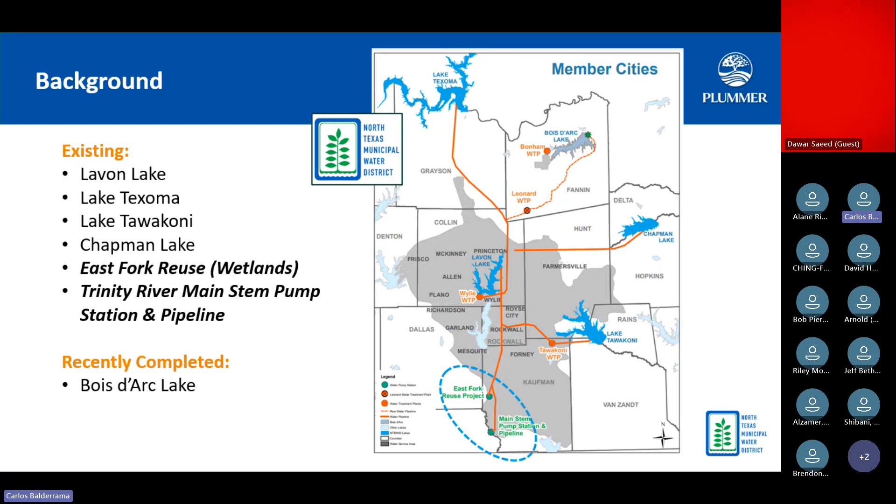Now, this is an indirect potable reuse project. If you're unfamiliar with what that is, I'll walk you through that. Up here, we have Lavon Lake, and again, the district has water rights there, and their main water treatment plant is at Wylie, shown there.

Water is diverted from the lake, treated to drinking water standards, distributed throughout the service area, and then a portion of that comes back as wastewater. That flows to the wastewater treatment plants, shown with these orange dots, and then that's treated to the quality their permit requires. Discharged, these on the south are discharged into tributaries of East Fork of the Trinity River. Those up here discharge into Lake Ray Hubbard, which is a city of Dallas lake. The district and the city have an agreement to allow that equivalent volume of water to pass through and flow down into the East Fork Trinity. That water then flows down to a diversion point located adjacent to the constructed wetland.

The district diverts a portion of that effluent into the wetland where suspended solids and nutrients are removed, improving the quality of the water before it's pumped back up to Lavon Lake, about 43.5 miles. It's pumped up, as the diagram shows, to the upper reach of this easternmost arm. That water then spends about a year detention time in the reservoir before it finally makes its way back to the water treatment plant.

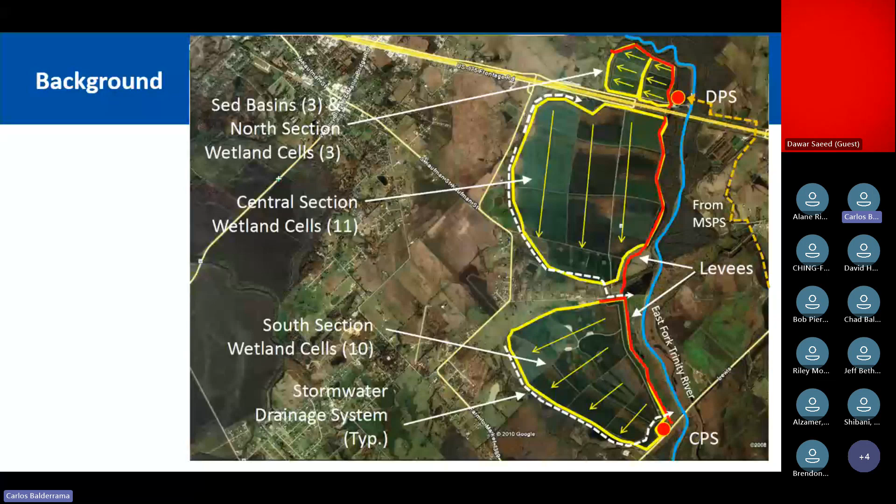So here's some aerial shots. This shows the river intake, the diversion pump station, and the 3 settling basins, wetland cells, the highway, and then the central section you can see here.

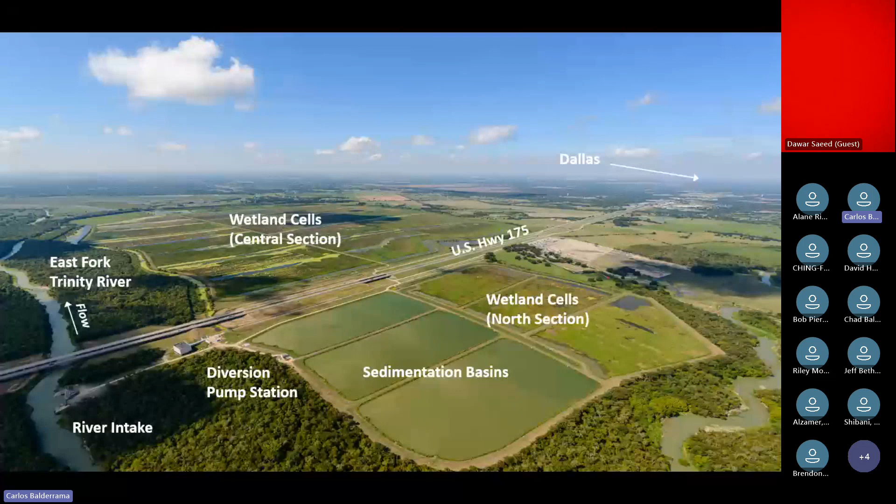And now we're looking at the central section with the river here in the foreground. Then now we're looking from south to north. This is the south section. The water flows through these cells, is collected, and comes into this terminal pond, picked up by the conveyance pump station, and pumped back up to Lavon.

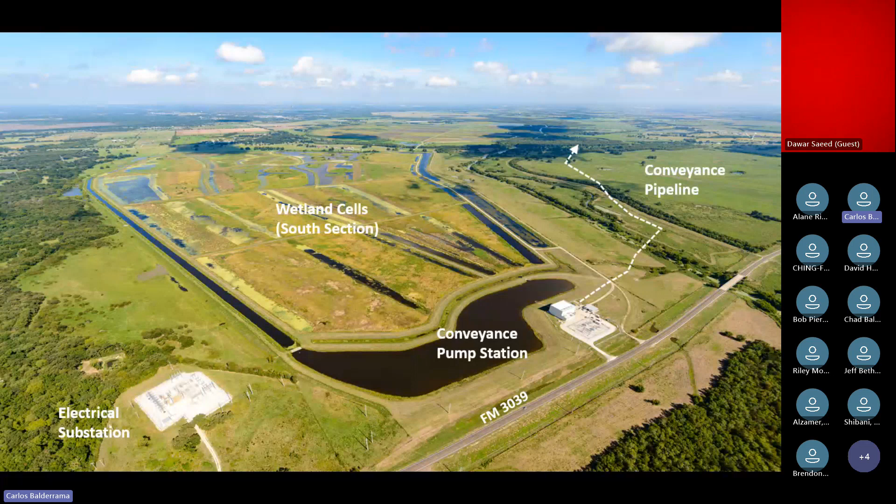This is the outfall at Lake Lavon. This photograph was taken during construction or right after construction, and the lake was down about 15 feet below conservation pool. So they were able to lay all this riprap in the dry, which was beneficial at that time for construction, but not so good for water supply.

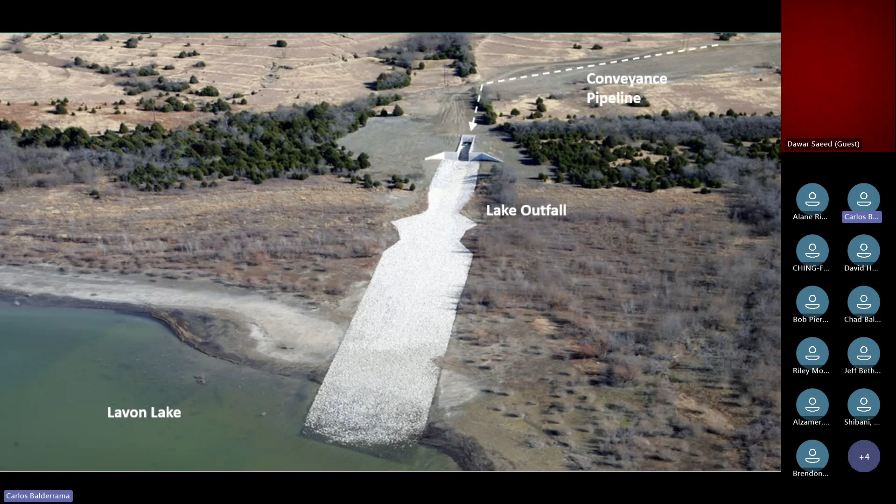So here you have the main stem pump station, an aerial view of it, showing the pumps there. And then we have a forebay, different from the East Fork wetland, which allows solids to settle out there.

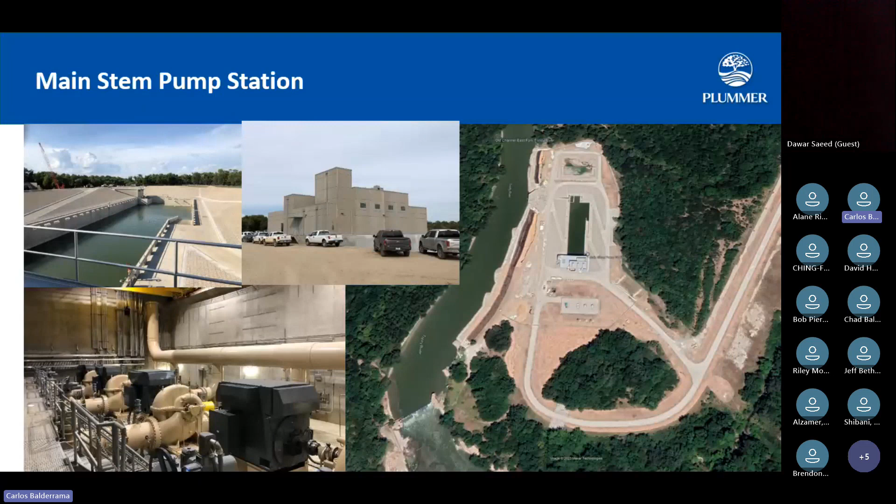Just talking about some background and history of the project. This project actually began in 2003. The board authorized it in August of that year. At that time, there was an urgent need for water that the district had. They were undergoing tremendous population growth in their service area, and of course water demand increased along with that population. That was coupled with some persistent droughts going on back then, and so the reservoirs were down.

The goal was December 2008, with final completion the following year in '09. So the district elected to go with a design-bid-build delivery approach, and we subdivided that into 11 projects. We had a different design team assigned for each of those projects so we could all work in parallel, with a lot of communication back and forth.

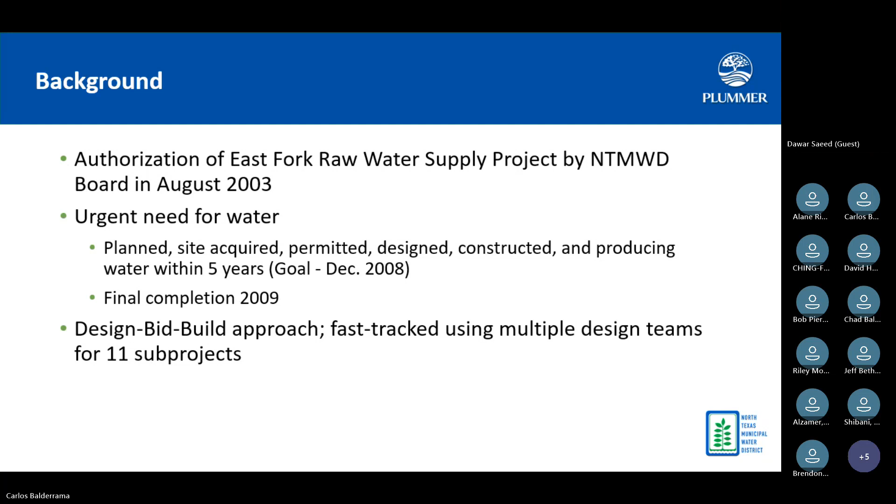This shows some of the project milestones. Again, we had a notice to proceed early in '04 for the design and permitting team. The district acquired a site in early '04. The permitting team got on it very quickly, submitted the 404 application in mid '04, and then about 15 months later, they had their permit in hand, which was a tremendous undertaking. Loretta will speak about that later in this presentation and also over the luncheon presentation.

All the design packages were completed in early 2006, which also included designing 2 early on-site nurseries, and we'll talk about why we needed those. Notice to proceed for the various projects was in '06, and they had a construction period. Then the wetland was substantially complete in late '08, and we began producing water in January of '09.

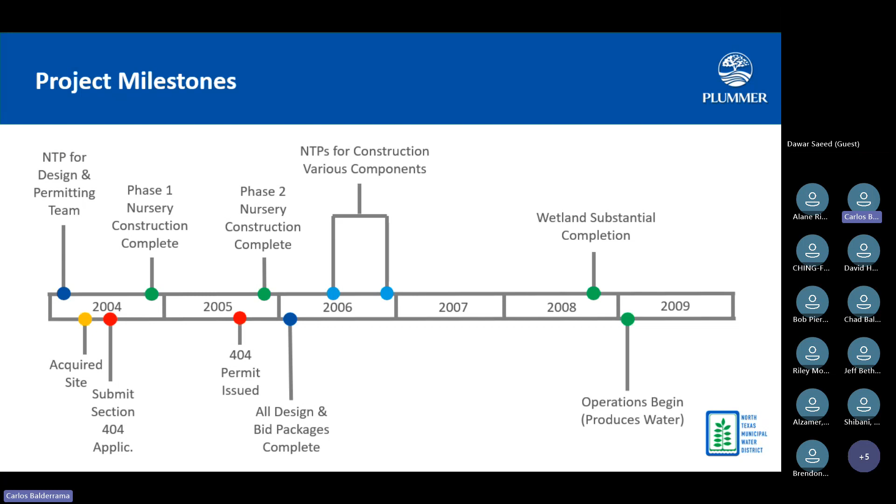So we met our goals of having water produced quickly within about a 5-year period. Project cost in 2009 was $280 million, and that included both pump stations, the pipeline, the wetland, and all the other ancillary costs such as design, legal, permitting, and so on.

The Main Stem pump station was completed in 2019, and that's almost half that cost as in 2009, so you can see how prices escalated during that time period. But in spite of all that, the cost of raw water produced from the project is very reasonable, 74 cents per 1,000 gallons. Compare that to water produced from a new reservoir, which is more than twice that, at 328 per 1,000 gallons. So it's a very cost effective water supply for the district.

As far as performance, this project has provided 143 billion gallons pumped up to Lake Lavon. And you can see the tons of constituents removed from the water before it went up to Lavon.

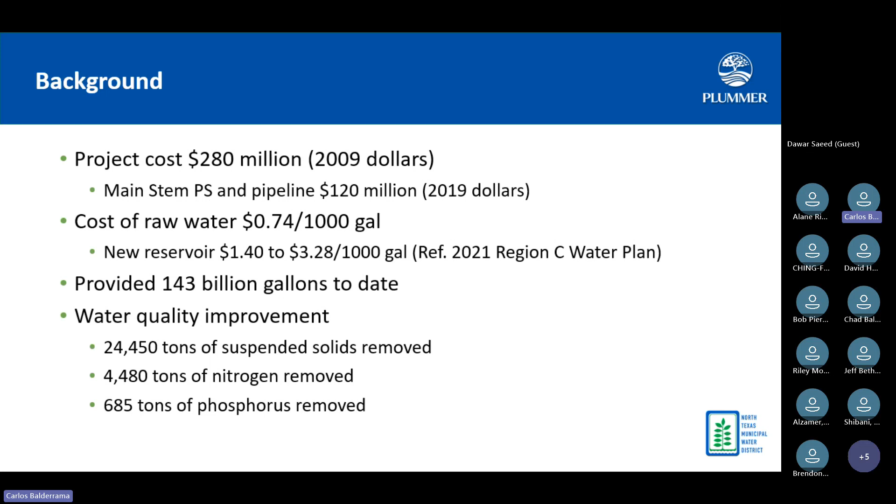I'm going to pivot and talk about some of the engineering aspects of converting a 2,000 acre working cattle ranch into a functioning wetland in about 5 years' time. Being a water supply project, everything focused around the amount of water that would be produced, so that was the main design basis everything came from. We had projections available on the expected effluent in the river itself.

You can see how projections went up and peaked in 2015, and our flow rates were based on this projected amount of effluent for diversion that year. We analyzed that and developed 3 different flow regimes into the wetland: a low treatment flow, a normal treatment flow, and a peak treatment flow, measured in million gallons per day - 24 to 48, and 107, which was later reduced to 91 MGD. The 91 MGD is what we used through the remainder of design, but we had a wide range, 24 to 165 MGD, that we had to design for. That was challenging at times.

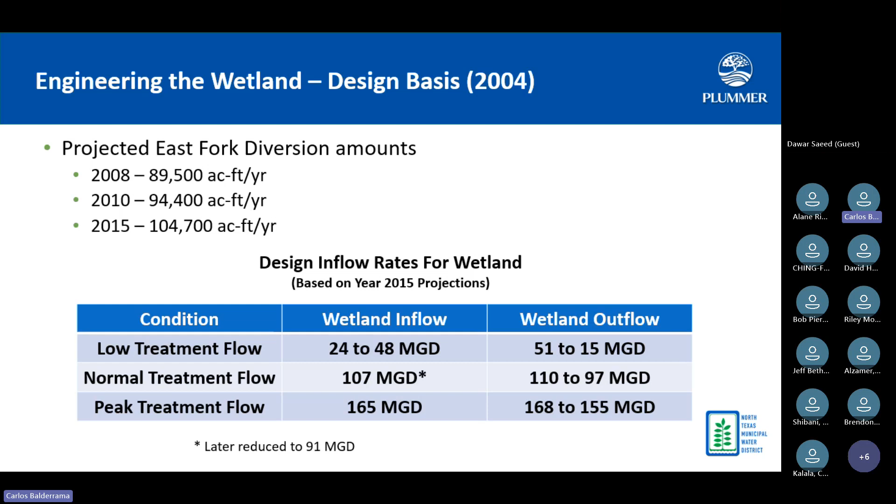Normally you look at inflow rate, which we covered previously, and inflow concentration, which we looked at using data available within the river. Based on that, you identify treatment goals for outflow concentration, and then work into how big a wetland can be, how you size it. But we didn't have that in this case - we had a limited footprint, a 2,000 acre easement the project had to fit on. We just needed to maximize the treatment area within that footprint, so we used that as our treatment area and then backed into the outflow concentrations, kind of the reverse.

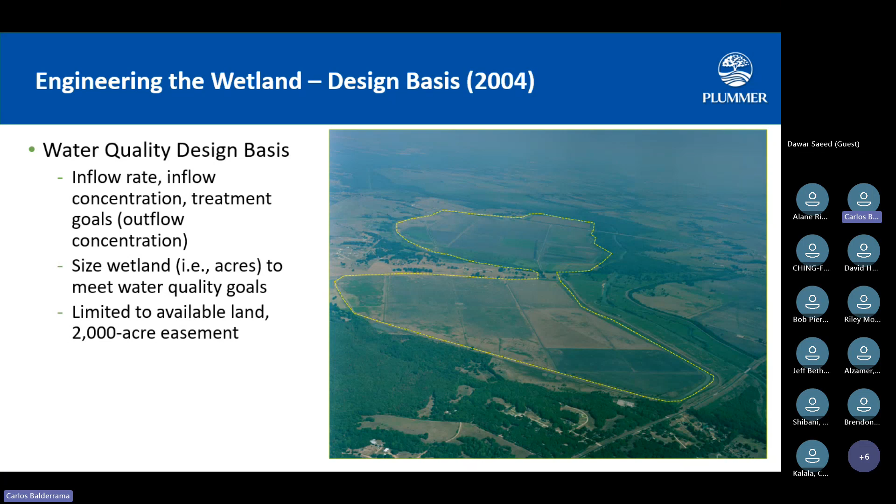So here's what we had - wide range of flow, wetted area 1840, and this was the projected effluent quality based on that period of record. We used three different water quality models to project the concentrations of total suspended solids, total nitrogen, and total phosphorus coming out of the system, and used best professional judgment to bracket that into a range. Of those, phosphorus is really what we focused on because that's more or less the controlling nutrient in Lake Lavon for algae.

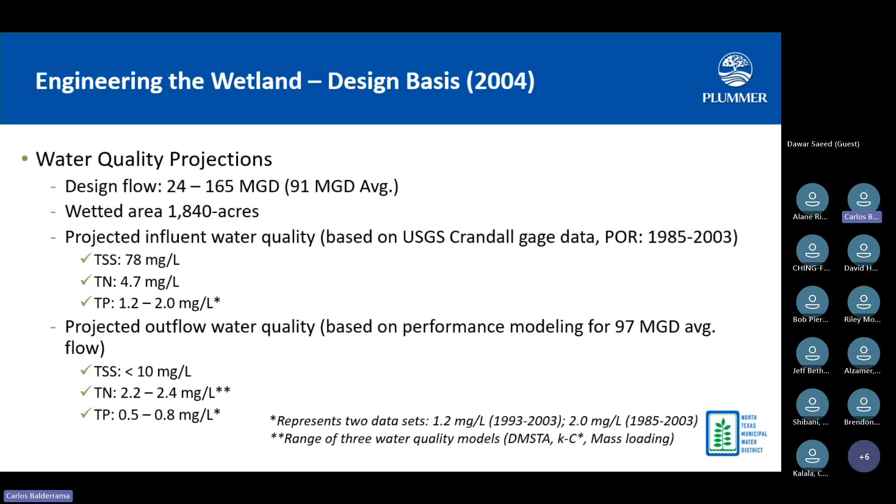Again, being a water supply project, hydraulics is everything. We worked through a monthly water balance and looked at inflows and outflows from the system, identifying the expected water loss for every month of the year, which was helpful in determining the quantity we would pump back, but also the quality too, because certain constituents increase in concentration when you have evaporative loss. So that was a necessary step as well.

Then we did normal civil engineering for water control structures, but for the wetland cells themselves, we wanted to manage the water with a range of 6 to 18 inches in depth over that wide range of flows, which was a challenge. We wanted minimal adjustments for the gates by the operator, so what we settled on was structures flowing into and out of these wetland trains needing 30 feet of weir. We accomplished that using three 10-foot rectangular weir gates, which allowed the water level upstream and downstream to stay within their desired range.

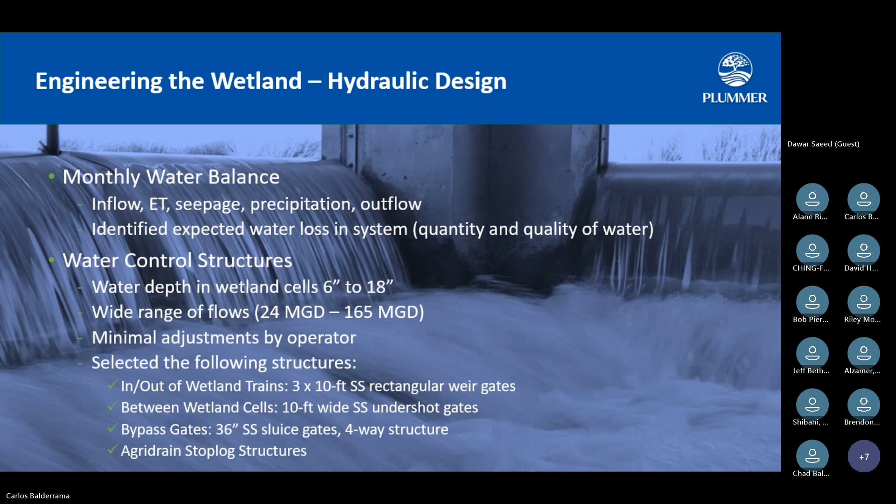We produced a hydraulic profile through the system from the sed basins all the way down the conveyance pump station, through every wetland train and through all the flow ranges. We used conventional equations and approaches for open channels, pipes, weirs, and so on. But flow through the wetland cell wasn't so widely known, so we applied an equation used in the Everglades area for the big stormwater treatment areas.

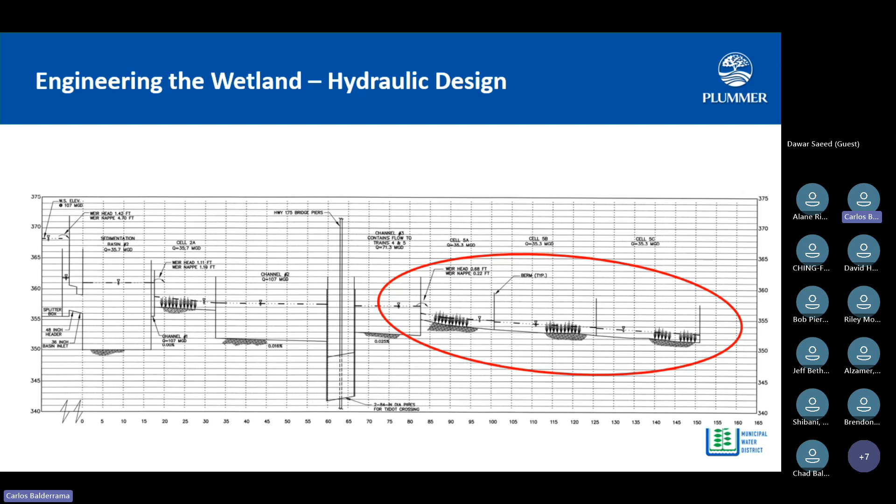The train and cell layout is also important. We wanted to flow by gravity from the diversion to the conveyance pump station, maximize treatment area, exclude stormwater, and have hydraulically efficient cells. By that, I mean we wanted to use every square foot of wetted area and allow water to flow through, because if water doesn't flow through, you don't have any treatment improvement.

The approach we adopted was to have a single inflow point and then a deep water zone immediately thereafter that allowed the water to spread out across the full width of the cell. Then a shallow marsh area with sheet flow, basically 6 to 18 inches of water, followed by an intermediate deep zone. The purpose of that was twofold: these deep zones served as the borrow area for the levees or berms, but also hydraulically redistributed the water across the cell. So if you had a short circuit, it provided an opportunity to recapture and spread it out. Lastly, we had an exit deep water zone and then a single gate structure between the cells.

Large earthwork project—we didn't have goals of hauling dirt in or out, so it was all balanced on site. It was an iterative process between the hydraulic grade line and cut-fill balancing that went through on the site civil design. We also spec'd out precision graded marsh areas with a slightly sloped bottom that varied from 3/10 to 1.5 feet, depending on the cell.

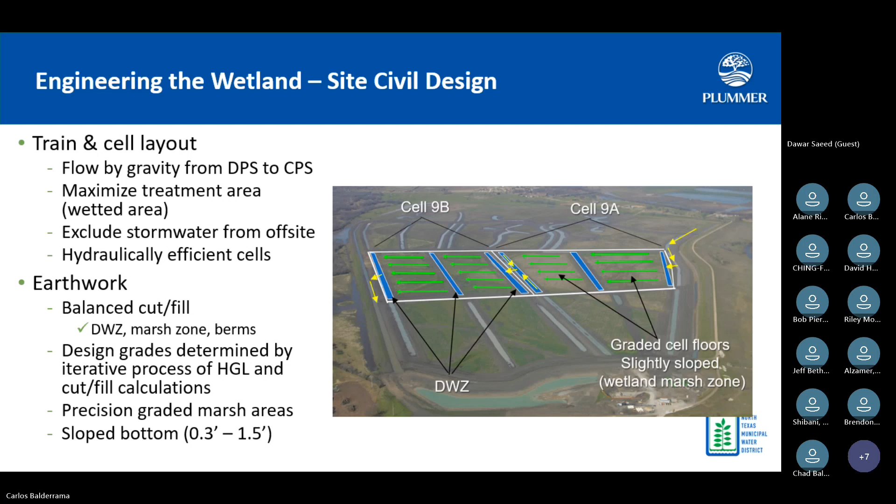All right, flipping to lessons learned.

Fast forward 14 years, what have we learned since design was completed? Things change. We projected a 91 MGD average inflow, and the actual observed through this period is about 33 MGD, about a third of that. There's a reason for that: there were persistent droughts, so base flow into the river was reduced significantly, and all those water conservation measures that the district implemented really worked, so we didn't have as much effluent coming back into the river system.

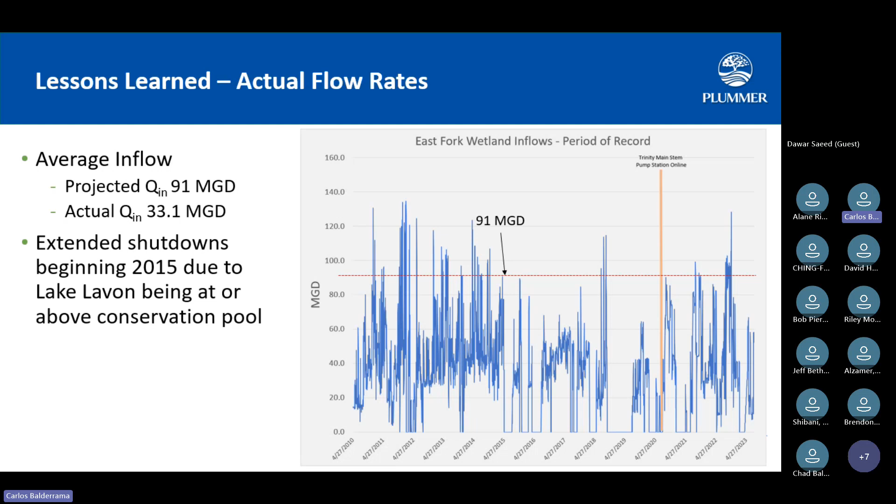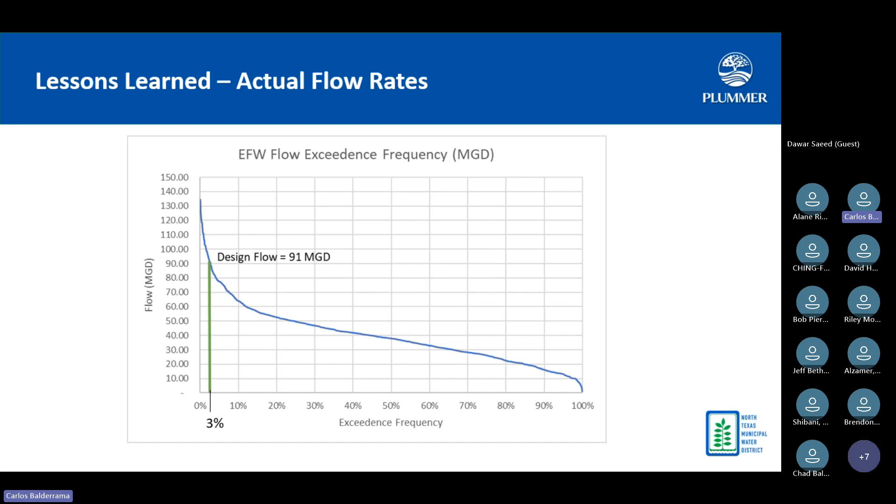Here's another way to look at it: this is a flow exceedance frequency curve, with inflow in MGD and our design flow at 91 MGD. Basically, we exceeded that only 3% of the history of the project so far, which again points out, in a different way, that we've had much lower flow.

On cell hydraulics, we learned that the combination of the sloped cells and low flow caused water to be much shallower at the upper end than anticipated, and pool up at the lower end. This really affected the vegetative community, since some plants tolerate deeper water than others. At the lower end, plants that could not tolerate deep water were drowned out, and we had to replace a lot of those with giant bulrush. We had projected we'd have somewhere between this M2 profile and normal depth, but in reality, because we were pumping about a third, we were between this M1 profile and a level pool most of the time—which makes sense at a lower flow rate.

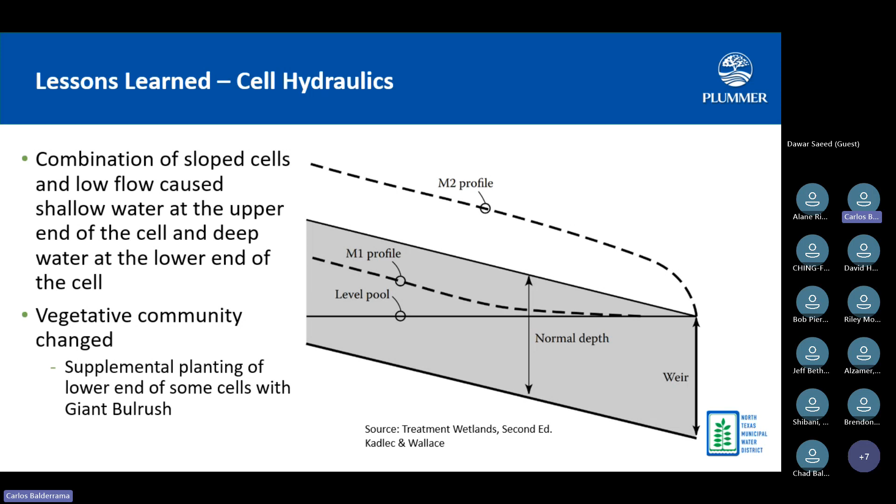We found that the deep water zones and the precision grading did a great job of distributing the water across the width of the cell, making them more efficient hydraulically.

But sometimes a short circuit would form. We found that the low flow really concentrated in that short circuit, and then you had a fairly significant dead zone as a result. So it's important for those to be corrected whenever they pop up.

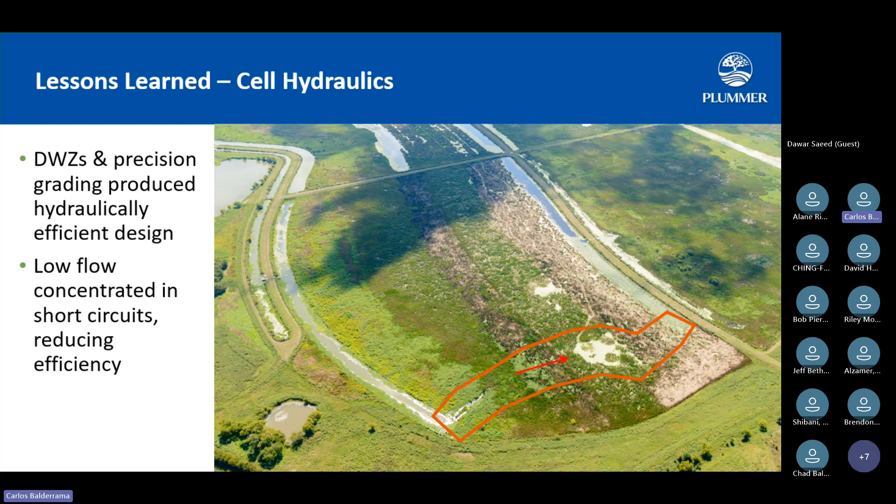Also, during extended low flow periods, we took cells offline to reduce evaporative loss. That didn't really affect the vegetation of those cells because it mimics the hydro periods of natural wetlands.

It also provided an opportunity for the district to perform maintenance on those cells, so it wasn't a bad thing.

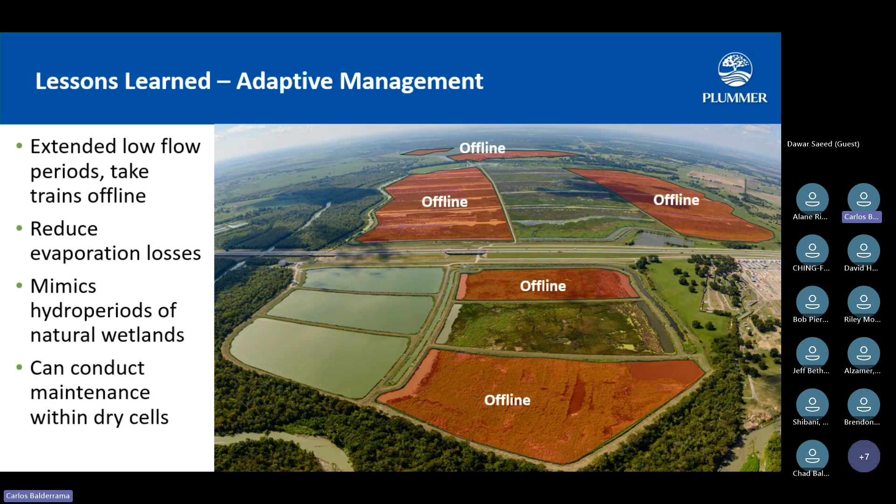All right, water quality. This is a table looking at TSS, nitrogen, and phosphorus with the projected and actual concentrations flowing in and out, and then the mass removed and concentration removed.

Now, for TSS, the projected and actual amounts coming in were relatively similar. However, we were producing more TSS coming out of the system than projected, and there are reasons for that we'll go over in a moment.

For nitrogen and phosphorus, because we had less base flow into the river, it was really dominated by effluent from the upstream wastewater plants. So the nitrogen and phosphorus concentrations we saw were very close to what was being discharged from the treatment plants upstream.

We saw that even though the total nitrogen was about twice expected, we still had really good removal of that.

On phosphorus, we trended also towards the upper end of the range, but actually we had many occasions where we had 3, 4, and even 5 milligrams per liter coming into the system, much higher than anticipated on that range.

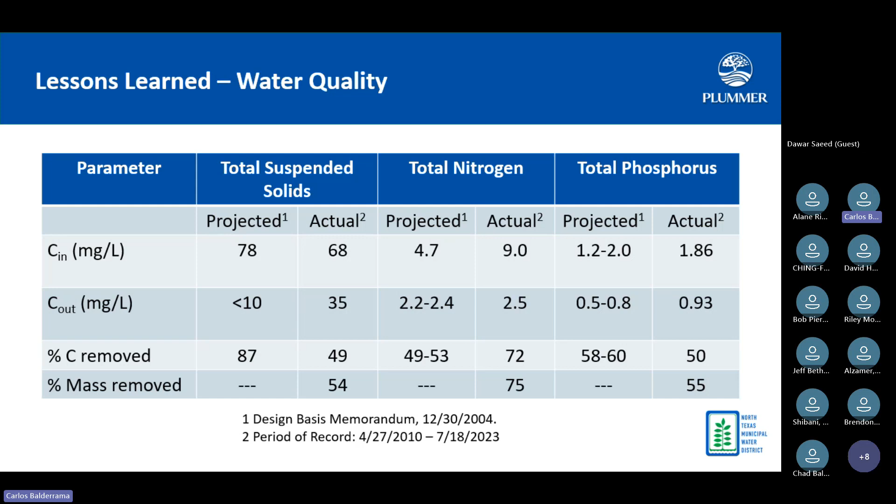In spite of all that, we had about 50% concentration reduction and 55% mass removal.

Coming in, we had more or less base flow with a couple of little rain events, and TSS was fairly well in hand there. But then you got a big river flow event with some peak flows, and it really stirred things up, as you might expect in the Trinity River, with very high TSS during those peaking events.

We found that the TSS during those peaking events was taken out very efficiently through the settling basins, as you might expect, because we had larger particles in the water column that settled out nicely.

But the rest of the time, we had colloidal type solids and algae that were diverted in and didn't really settle out. That was also taken out in the wetland downstream.

But here's one of the reasons we had higher outflow TSS: carp made its way into the system and became established. They're bottom feeders, they like to stir things up, and they really impacted the water quality, especially the TSS.

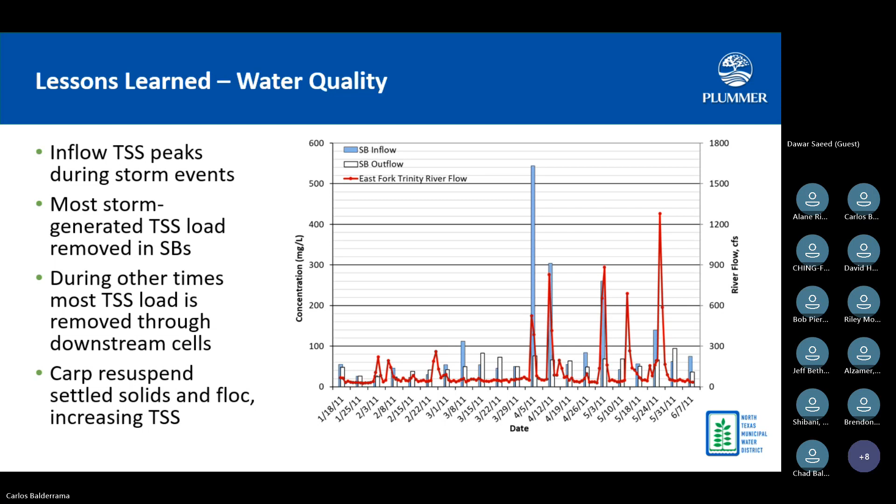Nitrogen removal in a treatment wetland is both microbial and plant uptake, which are the primary mechanisms. So, as you would expect, we see the seasonality of nitrogen removal, and that's what we observed.

Phosphorus also has some removal through microbial activity and plant uptake, but there are several other mechanisms for removing phosphorus that are not temperature dependent. So we saw that remaining more or less constant, which is pretty much what you'd see in other treatment wetland systems. This was no different from the others.

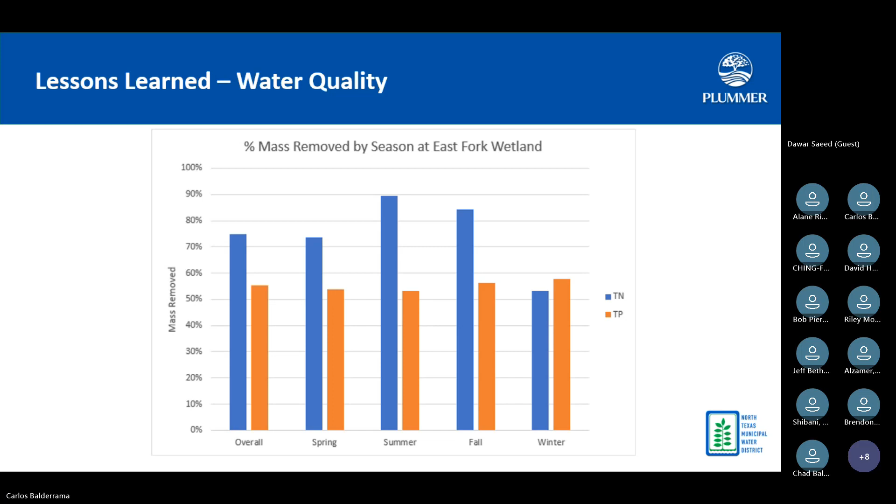All right, I'm going to hand it over to Loretta. She's going to talk about vegetation and permitting.

You're dealing with a natural treatment system, especially a wetland. Plants are very important. They provide a lot of the structure within the water column, as well as organic carbon for the microbial population to colonize and support their growth. So our goal is to have a very diverse, dense, aquatic macrophyte community. Emergent plants in particular is what we want, but we also need submerged aquatics.

About 80% of the constructed wetland is emergent marsh. The rest of it's in the deep water zones that Tim mentioned, and that works together with the dense vegetation immediately downstream of them that helps facilitate dispersion of flow across. The challenge when you're doing a 2,000-acre wetland is that you need a whole lot of plants in a very short period of time.

So you really can't rely on natural colonization. We needed the system to be up and producing high quality water as quickly as possible. So our approach was to look at propagating those plants on site. We had 1.8 million plant plugs. All of these were hand planted across the 2,000 acres.

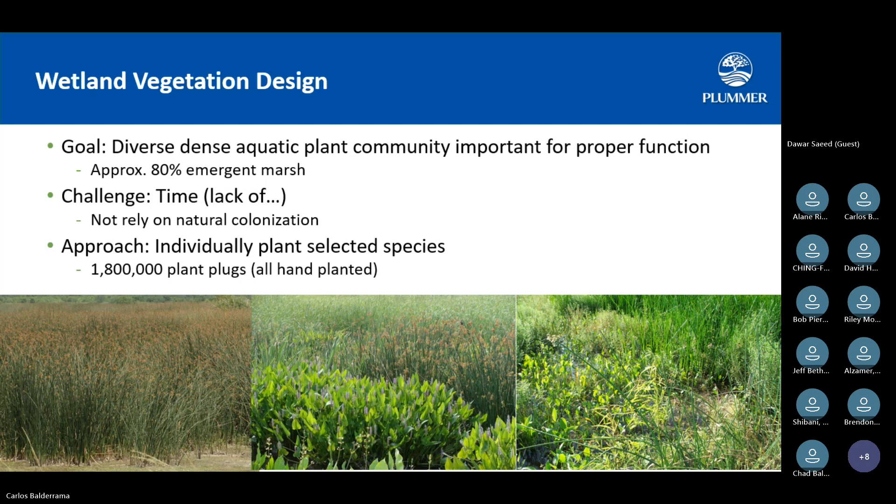Wetland design: we did a phase 1 nursery to be able to propagate first the plants we couldn't source on site with Bunker Sands, and actually developed several restoration areas for duck habitat that had some aquatic plants within it, but again, we were in drought. So we looked at 9 species we brought in from commercial nurseries, mainly from the Panhandle of Florida, to have something somewhat acclimated to the same climate we had here.

We produced those in the first nursery, then transplanted them to the phase 2 nursery, much larger, about 190 acres. We also harvested some plants from those duck habitat cells. So we had 18 species total, and that's what was used to propagate all the plants used to plant the full-scale wetlands. We began planting in January of 2007, and about 85% of the plants were planted in the middle of winter. So it's also good to have the plants on site that you're harvesting from. Nurseries don't like to get plants to you in the middle of winter.

This was the phase 1 plant nursery. You can see the initial planting. This one was actually outside the footprint of the constructed wetland. We used an area that's now called Bunker's Pond. It was another habitat area that Bunker had developed. Started planting in October of 2004. In less than a year, it looks like this.

Wetland plants are very productive, and when you do them with good nutrient-rich water, you feel like you have a green thumb.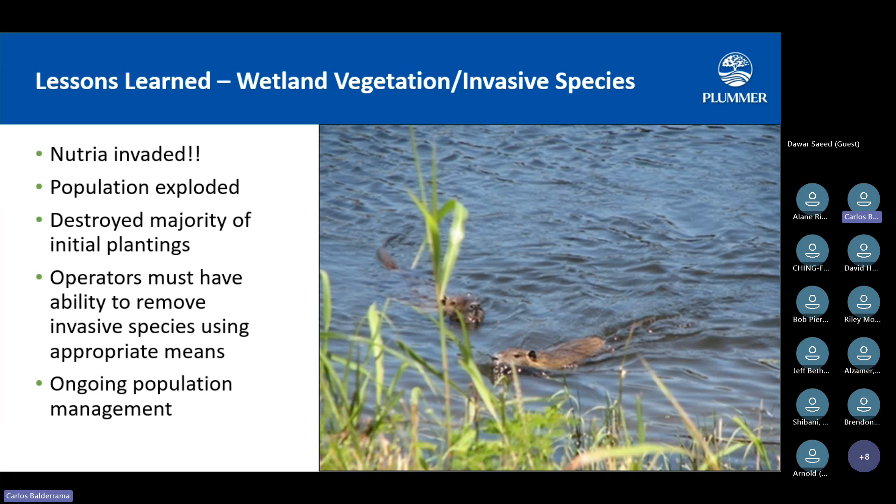Ongoing population management continues today. After we finally got things under control, there was a whole lot of Nutria cleared out in 2010. We've been gaining ground ever since.

The other thing that came in, as Tim mentioned, was carp. They come in through the pumps as little bitty fry. For the first maybe 6 months of their life, they're subject to predation from birds. Then they get too big to be eaten, and they start spawning in the wetland. A mature carp will produce about 3 million eggs per year.

You can see with the photo here on the left, this was a deep water zone where our TSS was over 100, about 135. The operators have a couple of pumps and they can drain down a cell and pump out the deep water zone to basically expose those carp. Natural predation takes effect, and then we were able to put water back in, and you got 13 milligrams per liter. Substantial difference.

The other thing the carp do is they affect the vegetative cover. They are bottom feeders. They'll knock out a lot of the softer tissue plants. As they're feeding across the bottom and ingesting the organic matter, they're basically pumping phosphorus right back into the water column through their digestive system. So they dramatically affect the system performance.

So that both affects not only TSS, but our nutrient loading within the system. We also have some other invasive plants.

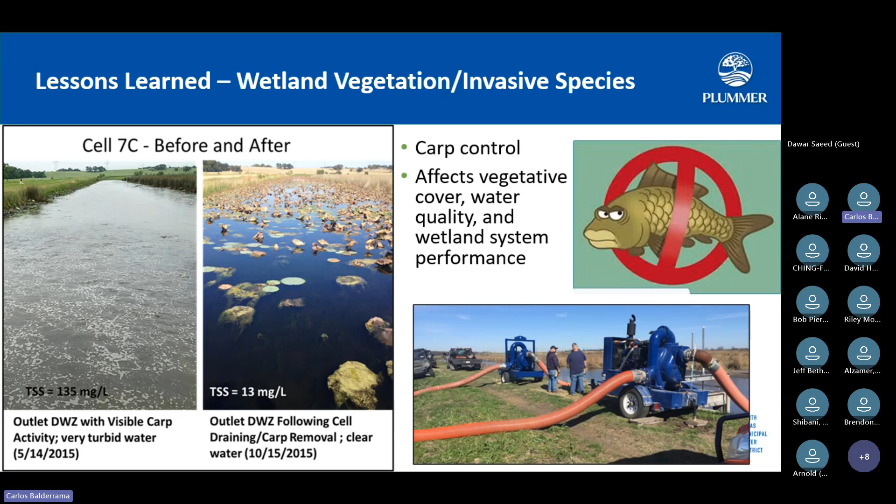Within one of the duck habitat cells, there was water lotus. This is this plant down here. It's very aggressive. The waterfowl come in to feed off the seeds. They've basically planted water lotus in almost every cell we have out there. How do we compete with that?

We don't want to be spraying a whole lot of extra chemicals that would kill all the other desirable plants that we have in here. So what we've been doing is planting plants robust enough to compete with that, primarily the giant bulrush and Holmes bulrush. We've been pretty successful in knocking it back.

Another plant that comes in the upper ends of the cell where it's really shallow water with these sloped bottom cells is climbing fern. It likes to cover over and smother the emergent plants we have there. So what we do is prescribed burns. Again, we don't want to spray anything that would kill everything we're trying to do. So they do prescribed burns during the winter time, and that helps control the climbing fern as well as getting the new growth to come back in.

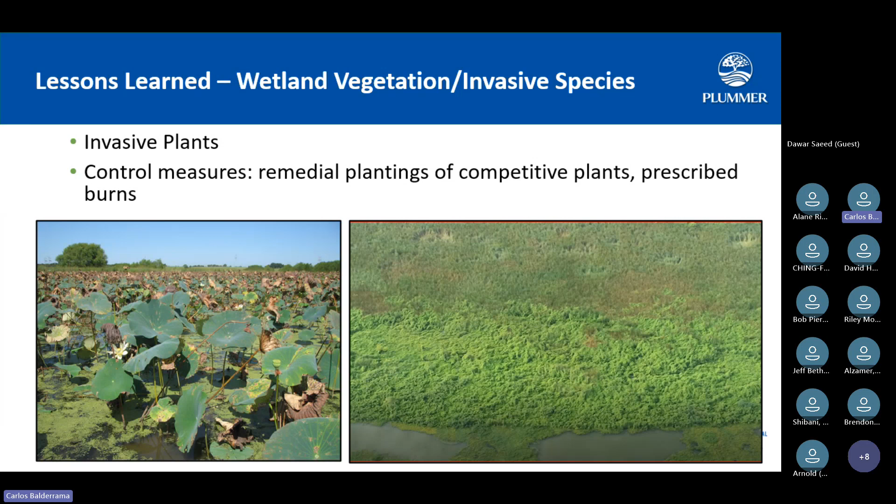One of the questions always asked is, well, it's a wetland, all this natural stuff going on out there, you don't really have to do any management, do you? But yes, there is ongoing management. As we've gone through the last 14 years, there are some things we've learned that require more aggressive management.

We do woody vegetation control in the shallow water wetland. We get a lot of willows, cottonwood, and some other woody vegetation - Chinese tallow has been invasive. So the operators now have equipment where they can actually get out across the 200-acre cell and spray those and keep them down. You don't want woody vegetation because the roots can penetrate the liner and cause a lot of seepage, as well as more water loss through their ET.

So that helps. One of the other exotic invasives that requires a lot of management is feral hogs. They thought the place was built just for them, and they can do a whole lot of damage within the cells as well as on the levees - their rooting tears everything up. So now that's controlled with trapping, trying to get back on top of them.

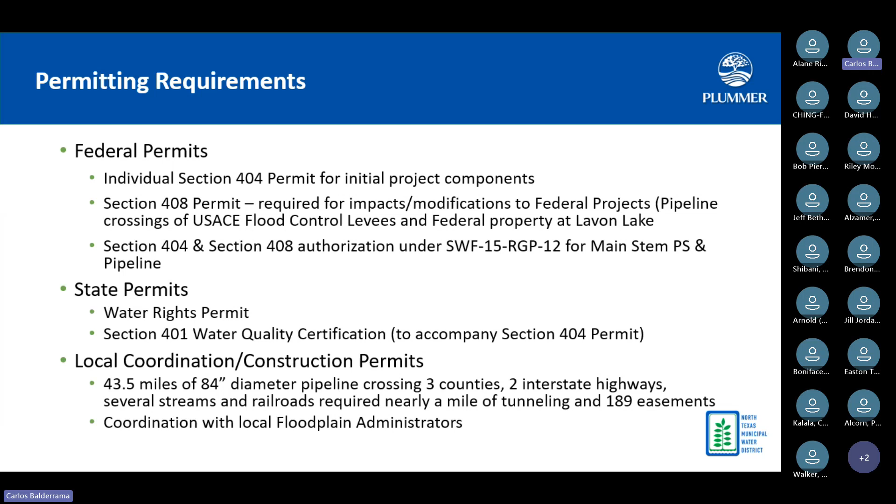Coordinating with the federal agencies, we started with the Corps, both the regulatory office, and we're going to be up there at Lavon, so we're working with the operations office, and then crossing the levee, so that's operations and Fort Worth. Both of those had to be coordinated very closely.

We had all of the information gathered, got as complete a permit application as we could, sent that copy to the Corps, and got the Corps' permission. This is before the days of electronic submittal, so everything's hard copy. We got the Corps' permission to make multiple copies and send it directly to all the coordinating agencies, so it wasn't the Corps trying to do the coordinating, we were facilitating all that coordinating.

After we gave them all the information, we said, okay everybody, come to the site. We want to show you what we're planning to do, address any of your questions, any big issues. This is a big site — just the ranch itself will cover 2,000 plus acres, and then you've got this pipeline all the way up to Lavon. So how are you going to do that?

We did the site tour around the ranch itself, showing what's going to be here and here, because this is all visionary right now — there's still a cattle range, we still have cattle everywhere, and we're trying to tell them what's going to happen. We do have the nursery to at least show them what the plants are going to look like. That really helped facilitate getting everybody's dialogue going.

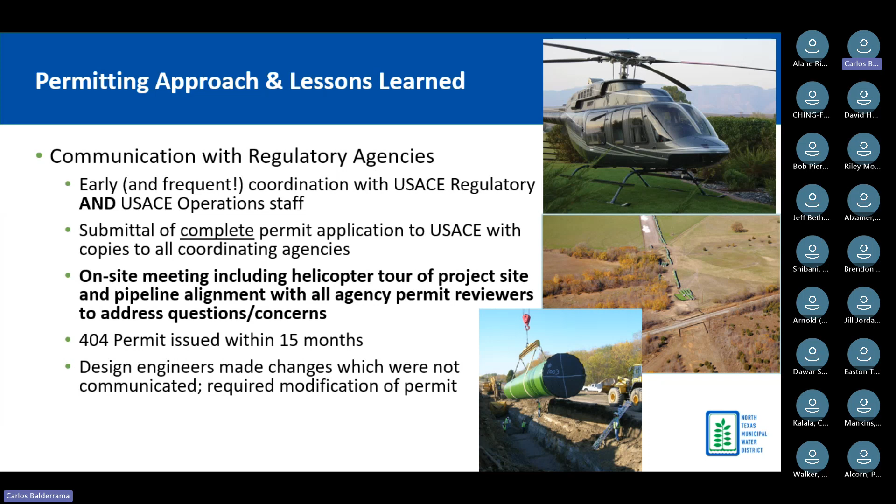For the 408, we had to do this for the pipeline crossings and for crossing the federal property of Lavon Lake — you have to go underneath, but you also have to do an environmental assessment. Again, we were able to prepare the draft and final draft notice of availability, and we sent hard copies of all the information to all the coordinating agencies, making it available for the public to see.

In doing all this coordination, we had both mitigation requirements under 408 as well as for the 404. We worked with the operations people over in Lavon — they had several things they would like to do, but nobody had the money or the ability to do it. We were able to do all the mitigation that was required on the federal property of Lavon. It was a win-win for both the project and for the Corps project owners.

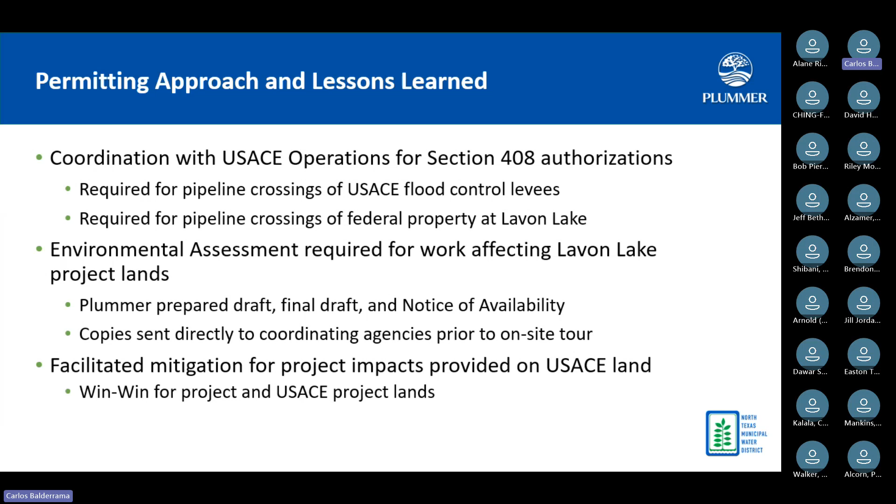Why is it the most difficult? Because it's got 15 feet below conservation pool. There's no way I could go out there and plant wetland plants when everything was bone dry. So we really waited almost 4 years to be able to get Lavon back up close to conservation pool levels to be able to do the wetland fringe planting.

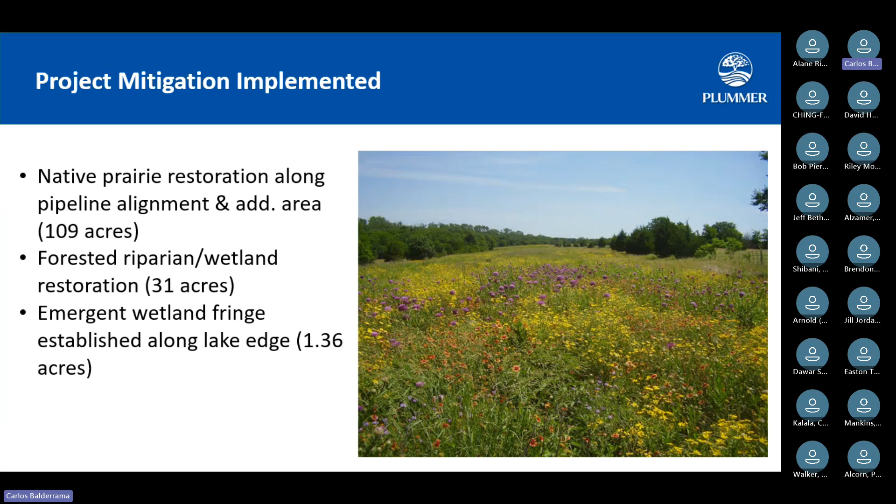On the water rights permit, we actually have a riffle zone just downstream, where this is the intake for the Diversion Pump Station, Highway 175. The USGS Crandall gauge is mounted off of the 175 bridge.

We did the biological survey that went on for a couple of years while we were already under construction. The agreement was that we would bypass 30% of the Trinity River basin return flows, and also maintain a minimum daily average of 25.8 CFS at that Crandall gauge. That keeps the riffle zone fully inundated, protecting the aquatic habitat there.

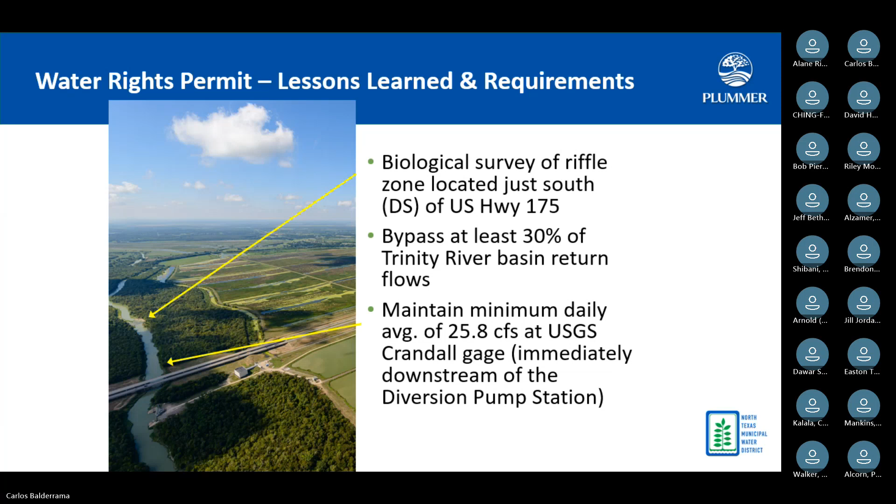At the Main Stem pump station, we already had a water rights permit. The district is buying water from the TRA. The 404 permit was actually submitted thinking we were going to get it authorized under nationwide permits. We were looking at a tight timeline again, given the ag levees down here as well as the Corps levee that had to be passed. So we were looking at 408 permitting again.

In addition, the Corps came up with a whole lot of requirements, so we had to do different data analysis and modeling to prove we weren't going to have an adverse impact to the aquatic life within the river with this diversion flow. That took us almost as long as it did for the original project, 13 months.

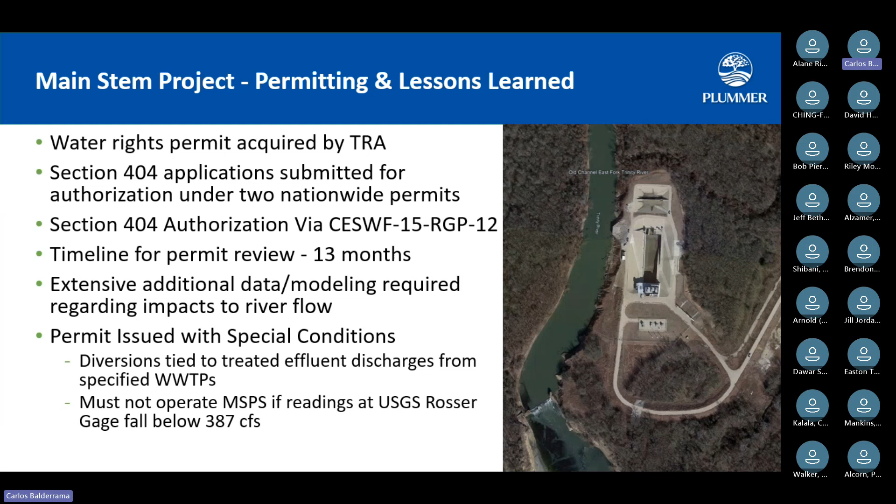This is just a picture of the completed Main Stem pump station. One key thing to note down here is Lock and Dam number 7, one of the remaining lock and dams on the Trinity River. That actually helps maintain a consistent pool for the intake up here for the Main Stem pump station. It's very critical.

Needed for this location, we again had 408 review for the flood control levy, but we were able to coordinate that with the regional general permit 12. The Corps had already done a programmatic environmental assessment in 2011 for all these different pipelines and levies, so we were able to determine it was a very streamlined process, no major federal action, no EIS required.

We only had the pipeline go up to the wetland, a minor impact to a forested wetland along the pipeline line. We were able to address that with the purchase of mitigation bank credits. Lessons learned.

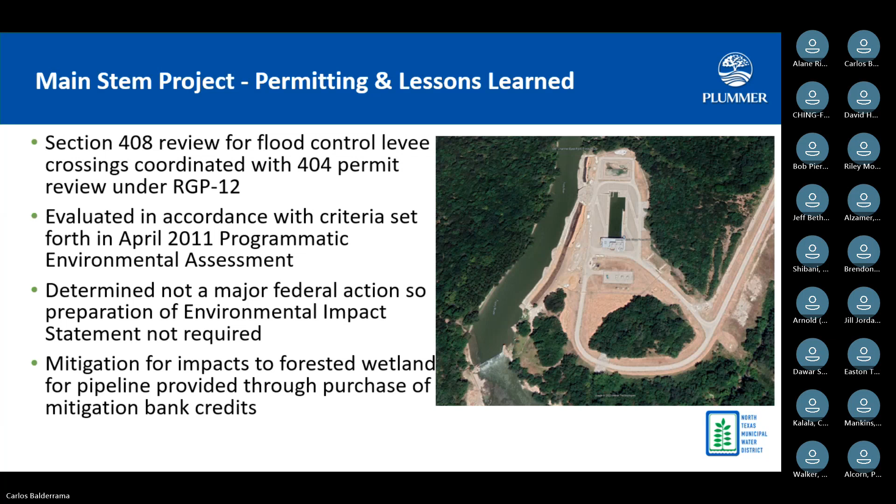This is an invaluable supply of water. The wetland itself provides water quality improvement. There are so many more ancillary benefits that come as a result of the project. The goal is water supply, and the objective is to improve the water quality so you're not having an adverse impact to the Lavon reservoir.

In the meantime, you've got educational opportunities, with an award-winning, engaging curriculum taught at the Wetland Center that's training the next generations of scientists and engineers for years to come. We have research opportunities, with multiple university-level thesis projects already done at the wetlands. We have community outreach, because you not only need to educate the kids, you need to educate the adults, the parents that come out there.